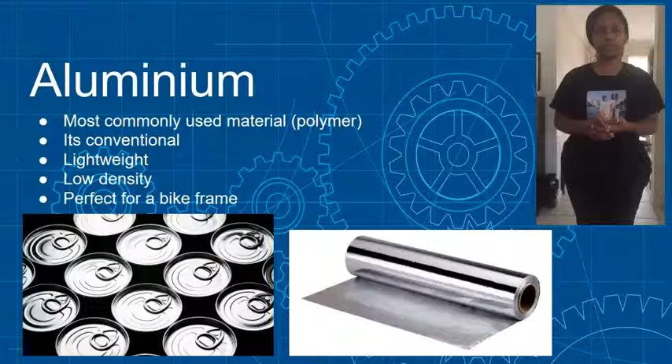The density of a material determines the elastic modulus. For aluminium, it has a specific weight of 2.7 grams per cubic centimeter, which is about a third that of steel. This means that with a low density, it can deform into any shape, and it can also be layered without becoming too heavy. This application comes at a great advantage where high strength and low weight is required, which is extremely useful in manufacturing bicycles, especially in developing countries.

Aluminium is impervious to corrosion as it generates its own protective oxide coating, which allows for maintenance of a bicycle structure, making it quite durable. And in addition to this, aluminium has the ability to be engineered into a form that can be as strong as and even stronger than steel. When aluminium has been used and has been through the process of wear and tear, its ultimate strength and strain hardening will decrease quite significantly, but this allows for an increase in strain rate, which means an increase in ductility.

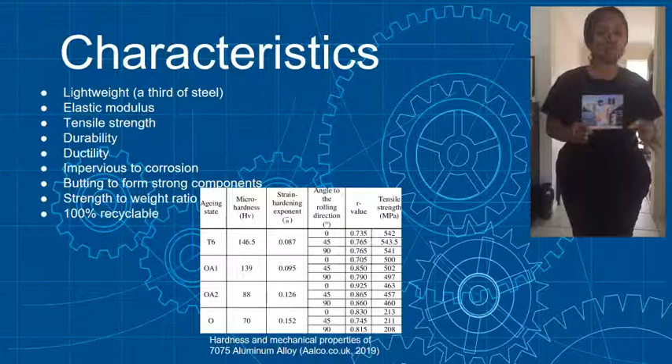With aluminium, butting occurs when the material is manipulated to be formed into a tube shape, with the walls of the tube being subject to change in such a way that it creates a thinner, lightweight structure, bringing forth stronger components to be used. Essentially, this process thins the center of these walls in order to reduce the weight whilst preserving the strong ends for welding points.

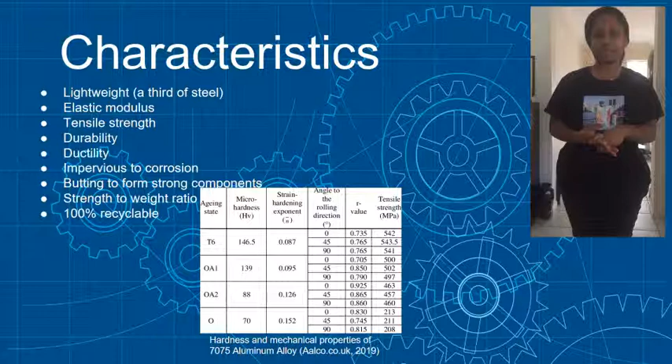Aluminium has displayed low cost and high performance, being especially suited for developing countries as it has an ease and safety of handling with great affordability. This material is 100% recyclable, making it perfect for developing countries, as it only requires about 5% energy in order to remelt the material into its virgin state. This allows for aluminium to be reused over and over again. For these reasons, aluminium is the perfect material to be used in manufacturing of bicycle frames. It's ideal, it has a high elastic modulus, and it's resistant to corrosion.

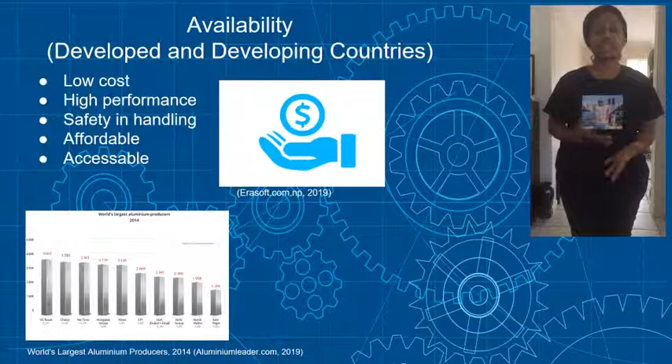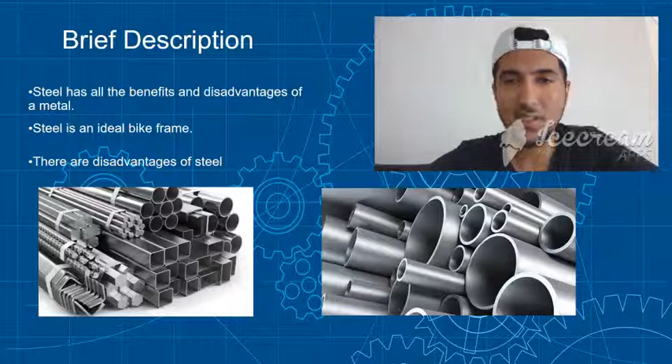The main steel being talked about is chrome molybdenum steel, also known as 4130 alloy steel. This alloy steel is used in high-end bike frames, as it has better strength properties than normal steel does, and it is easily put into a process called butting, which makes the steel lighter, therefore eliminating the disadvantage of steel being a heavy material.

The main properties or specific characteristics of chrome molybdenum steel are its high elastic modulus and tensile strength. It has a high elastic modulus of 190 to 210 gigapascals and a tensile strength of 560 megapascals, as seen in the table with reference below. This means that it is exceptionally durable and highly sustainable, and it also means that it's an ideal bike frame, as when put under a heavy force, it will deform less and it won't break as quickly as other materials would.

It has a high density of 7,861 kilograms per meter cubed, which means it is a more solid material, meaning less of the material is needed to be used in the bike frame, reducing the cost and waste, also meaning that the material is more solid. However, the downside to this is higher density means a higher weight, which also means that the bike frame will still be heavier, even though it is put in the process called butting.

It is ductile, which is surprising because of steel's strength and weight, which means it's ideal for a bike frame as it can be easily molded or easily bent. And it also means that when it's exerted under a load and it deforms, it won't snap as quick as other materials would.

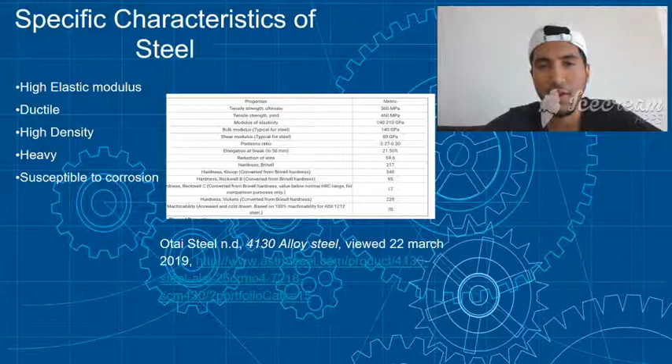Also, its disadvantages, however, are that it's heavy and it's also very susceptible to corrosion and oxidation, which means greater care with this bike is needed. It can't be left out in the rain, which is not ideal for consumers as they can buy other bike frames made from other materials and be able to use it in the rain.

It can be recycled and the cost is very cheap, and it is very easily used and easily molded into the bike frame, which means it's ideal as a bike frame because it's easily worked with, it's an easy material to find, it's easily bought, and it's easily recycled, which I believe is very interesting as not many steels are, and not many steels are ductile, which is why it's ideal.

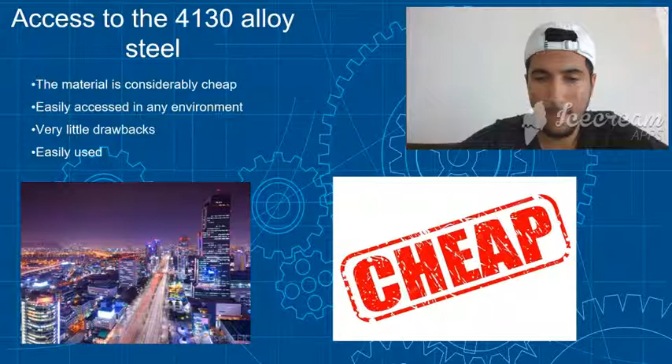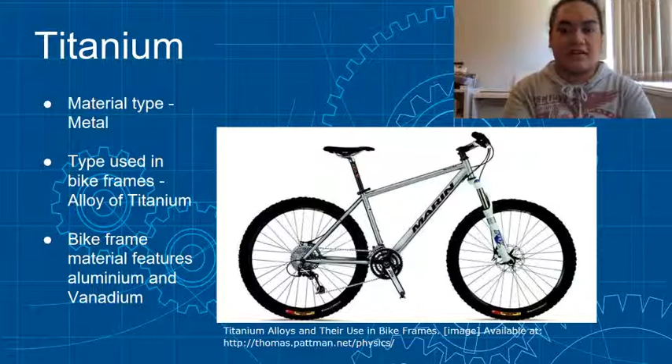The titanium in bike frames is an alloy with other metals, typically aluminium and vanadium. Titanium has many useful properties which are highly desirable in a bike frame's design, such as strength-to-weight ratio, durability, resistance to corrosion, and ride quality. The strong interatomic bonding energy between atoms in titanium enables the bike frame to carry heavy loads.

Its hexagonal close-packed structure with 6 atoms per unit cell allows the metal and its alloys to possess tensile strengths from 210 to 1380 megapascals. Upon impact, the bike frame will only bend as it is shatter resistant. This is because titanium has high ductility, which is an important aspect of the bike frame's design.

In its pure form, titanium is highly reactive in oxygen, and it naturally develops a thin oxide layer that protects it from corrosion. This metal is also much more corrosion resistant than stainless steel. Out of all the metals, titanium has the highest strength-to-weight ratio, as it can have the same tensile strength as many steels, yet only weigh 45% of it. Moreover, this metal is also 60% denser than aluminium, but 2 times as strong.

Compared to steel and aluminium, titanium has a low elastic modulus, but this means that the titanium bike frame will deal better with road imperfections, as it has a higher ability to deform in response to bumpy surfaces, leading to a more comfortable ride.

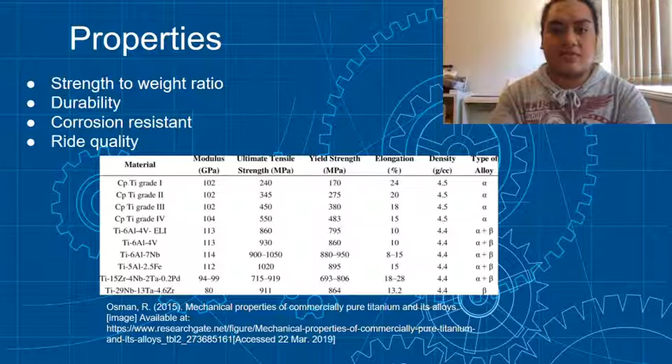While titanium has many benefits for bike frames, there is one major disadvantage which can make this material unfavorable. The cost of titanium is not cheap and comes with a heavy price of $25.73 per pound. Although titanium is abundant in the Earth's crust, the cost of energy used to extract the metal is costly, and the processing requirements are cost-intensive as well.

The hefty price of titanium also means that it is not practical in underdeveloped countries where money is scarce. The largest consumers for this material are developed countries, but to increase the market in other countries, suppliers for titanium will need to produce less costly alloys.

If budget were not a factor, titanium would be the perfect metal for a bike frame, as it is durable, lightweight, and would last years. However, this material is not suitable for bikes in third world countries who desire cost-effective materials, as titanium is expensive both in terms of the material and in labor.

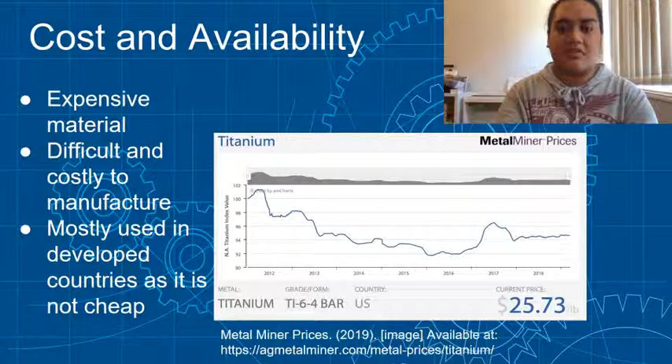The performance of a bike is dependent on the interaction of a number of variables, such as the environment and its structural form, which has an influence on its capabilities, those being the conditions that it's able to withstand and the overall experience that it provides.

This presentation focuses on the structural form, more specifically the frame of a bike. The standard method for determining the quality of a bike frame is through observing the material used and the influence that its properties have on the characteristics, and therefore its overall performance. In this case, the application of carbon fiber as a material to manufacture the frame of a bike will be analysed.

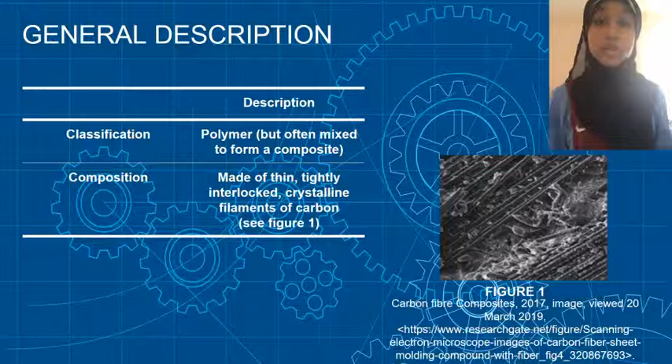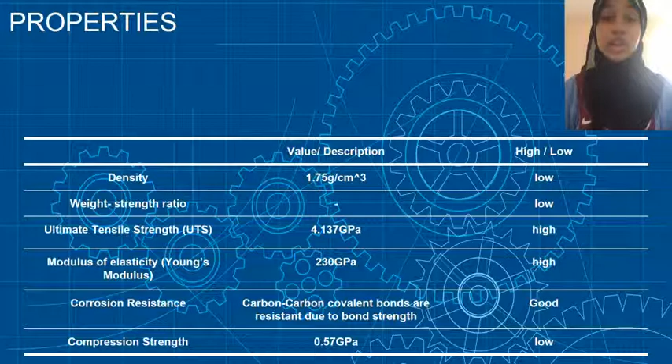Carbon fiber, classed as a polymer in terms of its general composition, is made of thin, tightly interlocked crystalline filaments, as shown in Figure 1. It's renowned for having characteristics greatly sought after in a bike, those being lightweight and durability.

Its lightweight nature is a result of its density, which is well below 5, at 1.75 grams per centimetre cubed. As it has a low density, and density quantifies mass per unit volume of a given substance, it can be inferred that it possesses a low weight-to-strength ratio, meaning it's lightweight but can still bear a significant load.

In terms of durability, carbon fiber offers advantages such as high ultimate tensile strength, a high elastic modulus, and corrosion resistance. With an ultimate tensile strength of 4.137 gigapascals, it's able to withstand a high level of stress while being stretched or pulled before failing. Its elastic modulus of 230 gigapascals denotes a high stiffness, as the greater the modulus, the less likely a material is to deform under a given stress.

The carbon-to-carbon covalent bonds within the material are naturally resistant to oxidation due to their bond strength, making carbon fiber resistant to corrosion. A disadvantage of carbon fiber, however, is its low compression strength of 0.57 gigapascals, which makes the material brittle. This is a result of the sheet-like aggregations within the material itself, which readily allow the propagation of cracks.

But as identified, there are various applications of carbon fiber on the frame of a bike based on its properties, which make it an ideal manufacturing material.

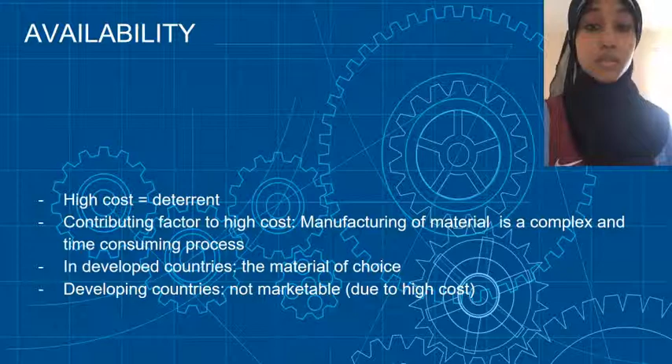In this section, I'll be covering magnesium alloy and why it's the optimal choice for use in a bike frame. The one big factor which influences a bike frame is weight, and magnesium alloy is the perfect solution, as it has an extremely low density, between 1.75 and 1.85 grams per cubic centimetre. Compare this with aluminium alloy, which has a density between 2.5 and 3 grams per centimetre. This is a substantial difference, and that weight reduction will help in the maintenance of the bike frame.

The other factor is that magnesium alloy has a hexagonal lattice packing system. This allows it to have greater force distribution without sacrificing its tensile strength or strength in general.

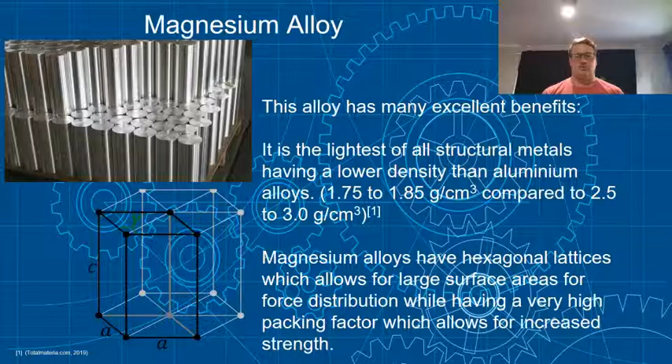Not only does magnesium have an extremely low density, which makes it useful in bike frames, it also has other properties that make it very durable and useful. For example, the Young's modulus of magnesium alloy ranges between 40 to 50 gigapascals, which is an extremely high value considering its density is so low.

The other factors that make it extremely useful are its very high tensile strength, anywhere between 160 and about 250 megapascals, and its machinability. With 100% machinability, this means it can be very easily worked and molded into many different shapes and sizes.

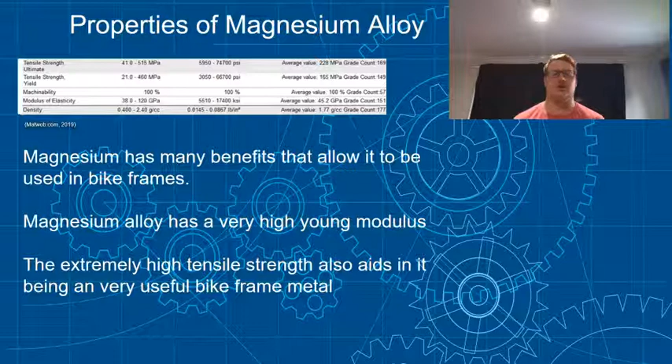Purely on a cost basis, compared to something like aluminium, magnesium alloys cost anywhere from $1,100 to $1,300 per ton. Compare this to aluminium, which is anywhere from $1,800 to $2,100 per ton, and this is obviously for 99% purity.

Not only for these low costs and easy purity, but due to its easy machinability, this allows it to be used extensively in both developing and developed nations. Being an extremely good metal, it can be used either way, but in developing countries it's very easy to use and quite cheap. Due to its recyclability as well, it can also be used for many other things.